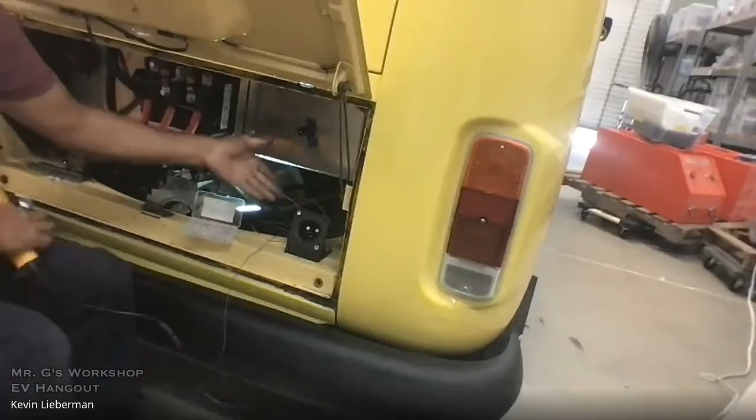And what's the 3D printed part? We're going to go through it more later, but just as a preview. Yeah, so we're using the NACS connector on this bus, and we had it in the gas tank hole, which is nice and sexy, but it's like trying to give an elephant a proctologist exam to try to get your hand in there to get it back in the right position. It's so difficult. So instead, I designed and 3D printed this bracket for the NACS adapter that goes right in there, going to sit in the engine compartment instead until we find somebody small enough, brave enough, and with skinny enough arms to put it right back in the normal gas hole.

All right, so that's awesome, and it's actually better because you open the door and you get to show what's going on. So yeah, let's get into more of that a little later.

That's pretty cool. All right, we also got Tyler Joy, and we got Nick C from Arcblast. How you guys doing? Not bad, glad to be here. Doing good. Doing good. And they've got some cool stuff to show us all about how to get an electric race car to compete with gas cars.

You got to do battery swapping. Wham! Pull the battery out, drop it, get the next one, throw it in. And it's not that simple because they're heavy. So we're going to see all the CAD work that goes along with that. And I know that actually Alex has some racing experience as well. So these are like the perfect people on the call. Pretty cool, tonight is going to be exciting.

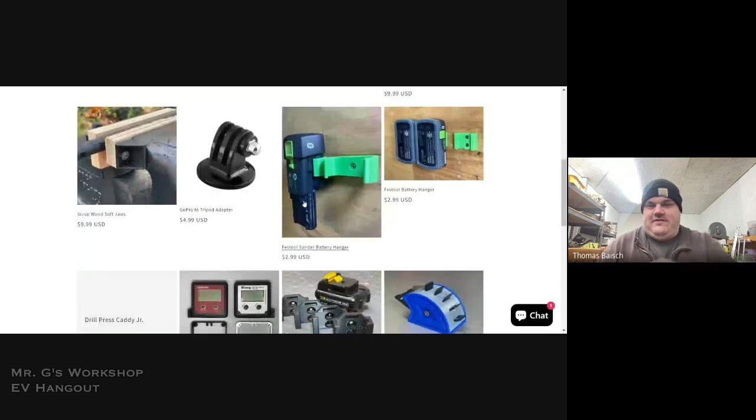My first thought was, that's a stupid problem. But when you take that thing off its loop, it pokes out at you, and it's just waiting for you to throw something on it. That's just like a Livestrong bracelet. No, it makes sense because otherwise it's going to sit on the floor, or on a shelf. You put it, you hang it on the edge of a shelf and then eventually it gets knocked over. But this, it's just a more secure way.

So you pick the product you want to talk about because you got so many? I know, scroll down. Well, some of them are replications, so that's a Delta lamp.

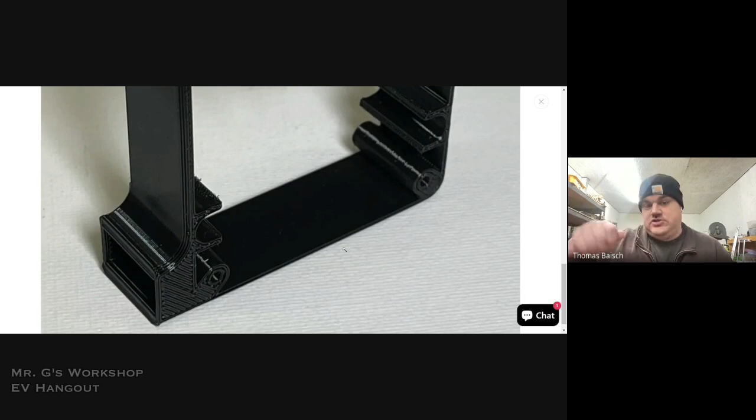Here, the digital angle finder, I think, is designed - it's not a great picture though. No, that's the indicator, that's just for my lathe, and 3D printing is fine because that's about how accurate I get. So this is a digital angle finder, and what you're looking at there is a new ring for it - you basically unscrew it and replace it. On the bottom left is where you move the magnets to. This is to find the angle on your table saw typically, though you can use it for anything, of course.

The way it comes - I don't have it in front of me, but I have this in front of me - the magnets are on the side, and you have to raise your blade. I'll use the bottom of my screen here. You have to raise your blade enough for the entire thing to hit the side. There you are. With that, you only have to raise your blade about 3/4 of an inch, and you can snag the edge of it. Does that make sense? Did I explain that well? I think so, maybe. Oh, it's on a table saw. Yeah, on a table saw blade. Normally you have to put the whole face of that edge on your blade, which means you have to go almost all the way extended, and it's a super annoying thing.

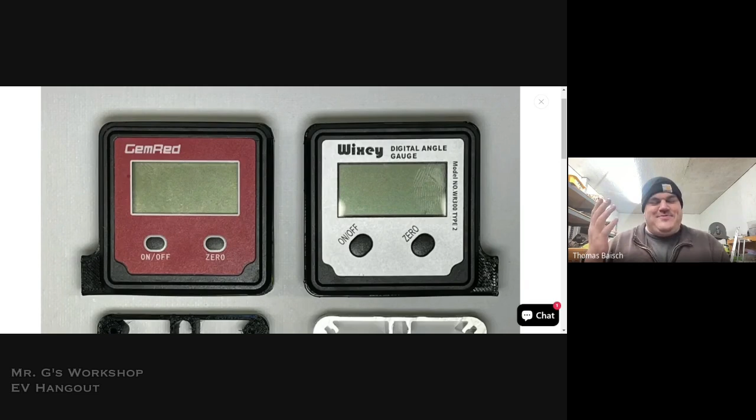But it's barely a problem, right? Woodworkers like to spend money on all kinds of stupid things, so it fits right in the category, and I'm one of them. I'm not blaming them - well, it saves time. Yeah, it saves a lot of time, especially after you get your depth set and then you think to check your angle or whatever. It's super annoying.

There's a lot of battery magnets on there, and then something like here, the card shark on your right, the blue and gray thing - this is just one of those ideas. It's just a card holder, nothing special about this. The only thing special about it, and it's not even in this picture because I'm terrible at updating my website, but I bought micro SD card slots that you would solder onto a board. So when you put them in there, they actually click in and click out. But they're not soldered to anything, they're just friction fit into there. Oh, that's cool. Yeah, it's just a clever idea.

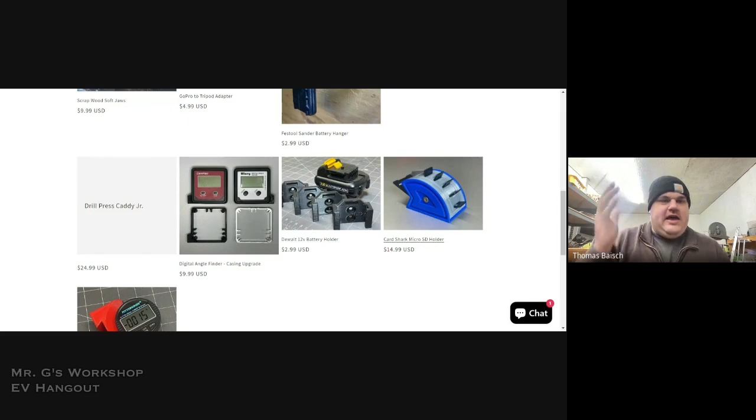But again, like this is one of those examples of it's kind of too expensive, but that's what it cost me to make it. The whole idea behind designing as many things as I can as quickly as I can was to just ignore those factors and just do it. And a few of them sold.

And what about, what do you think your highlight is? The FrogPod? Yeah, FrogPod - so FrogPod was number 39. And I have one here, of course, I had to go grab one. It's a camera mount. I should have sent you the Kickstarter page, there's just better photos on there.

But that first photo that'll cycle, there's a GIF there. Yeah, that explains it all right there - literally, that's the whole idea right there. It's just a 3-legged magnetic tripod, essentially, and it's very hard to get off sometimes. That was number 39.

And that's what slowed me down on my path to 100 ideas. I did a Kickstarter for that, raised about 35 grand, which was incredible. I printed every single one of them on Prusa Minis, delivered every single one of them - I'm probably around 1,000 FrogPods sold at this point. Yeah, that ruined my goal, but at the same time, it proved what I set out to do, right?

Yeah, it works, I have one. I appreciate it.

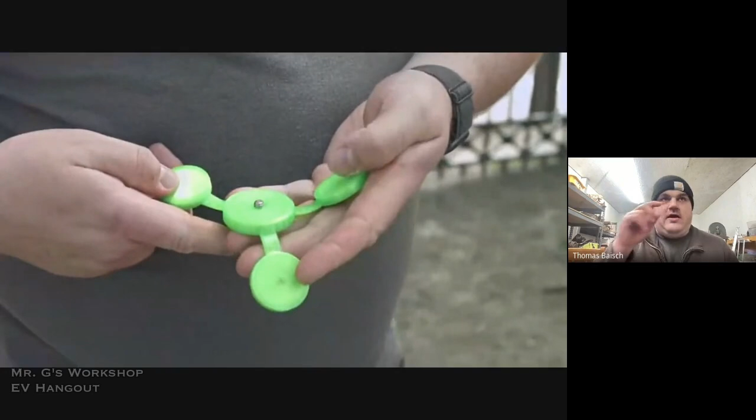No, a lot of them need to fit something, and the iterating to get something to fit, you can usually print just that portion of it. You don't have to print the whole thing to make sure it fits. You can print just like the circle that fits on the rod, right? You don't have to print the whole contraption.

With the FrogPod was the first one where I felt like when it was complete, it was actually done. So many of the things I could go back and redesign 10 more times, even though they're fine, they work, I've sold them, there's no complaints. I feel like I could just keep iterating on those things. This was the first time I felt like I couldn't improve it anymore. I'm not going to say it was perfect, that's not what I mean, but it didn't need anything else. It's perfectly good enough. It really was. It still is.

10,000 people told me to put suction cups on it, and it took me a while to just be like, no, that's not what it does. Glow in the dark, and to just turn it down. It doesn't have to do everything, but what it does better than anything else, right?

Does it glow in the dark? That's what Frank wants to know. Is that what you just said? No, not yet. I haven't actually... I don't know if they make glow in the dark TPU.

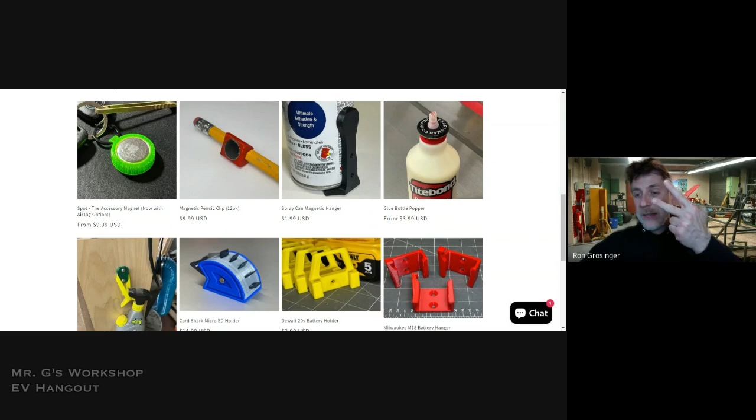There is something very curious about what you've done. I have 2 observations, kind of questions. What is your go-to CAD and 3D printer of choice? And then, how are you making this awesome, flexible? I tell you what, I've pulled on the FrogPod, it is incredible. So 3 questions: what's your CAD go-to of choice, what's your favorite printer for certain situations, and how are you getting filament that is flexible?

Yeah, so I use Fusion 360 because it was accessible. I was using SketchUp a long time ago, and it had its limitations at the time. I have no idea what SketchUp is like now, so use it if you use it. I switched to Fusion 360 because it was free, and they've changed their pricing structures now, but it's still free for some access. It's very powerful, and it's simple enough that you can learn it, whereas SolidWorks has so much more power, so much more possibilities, but the barrier to entry is way higher in my opinion. So I do like Fusion for that reason.

I forget your second question. The printer of choice? Yeah, so the printer I'm using now is the X1 Carbon by Bambu Lab, and I gotta say, it's almost flawless, it's almost a perfect printer. Is this it right here? Yeah, yep. So that hit the scene, and that really revolutionized the consumer 3D printing market.

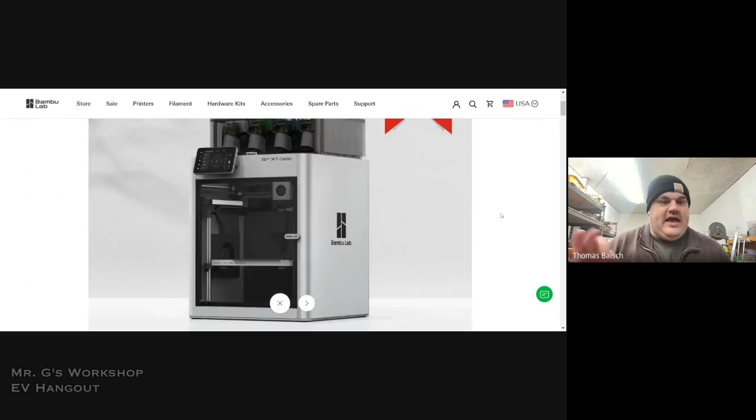It came out with so much more tech than anybody else was using, and for the same price point as the other very popular brands. And it just works every time. The few failed prints I've had, several of them were my fault.

Like I put the wrong plastic in and didn't realize it for a while. It's reasonably priced. Even with the AMS, the filament changer on top, it's like $1,600. $1,200 without it. Honestly, you don't need the filament changer, but it's just a nice perk. Very reasonably priced, good size print bed, and I'm telling you, the thing just works.

How many of these do you have? Just that one, just one. You do all your prints on one? Yeah, I'm not that busy. But this thing's also like, I want to say...

I bought 4 Prusa Minis for the FrogPod thing, and I've since sold 3 of them. But this is faster than all 4 of those combined. I can print more on this than anything else.

I make these TV doors for an old TV from the 80s, the doors you click and they drop down to change your color and tint. It's for a collector's item between Sharp and Nintendo, with a Nintendo Entertainment System built into the bottom like a TV VCR, and these two doors are always missing. I recreated them and print them, and it's a high quality print because that's what the community wants. One door took over 15 hours to print, and this printer does it in 3, and it's better quality. I can't recommend it any more than that.

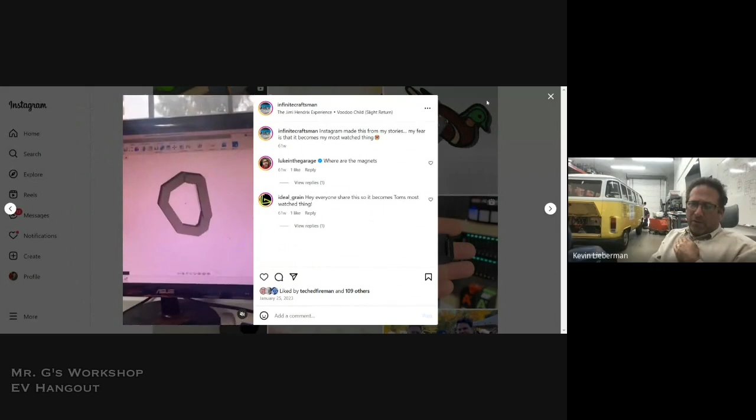But I've wrestled with so many terrible printers, and the project becomes getting the printer to work instead of printing what you want. So I'm tired of that. It's got to self-level the bed, it's got to get to the right temperature. I don't want to be updating firmware all the time, making plates of spaghetti. It's got to work every time. So that's why all my cheap ones I've given away now, basically, and I'm saving up for that.

Give them to your enemies. Yeah, I put an ad up on Craigslist, literally saying 'this thing is a piece of shit, I want $100 for it, I'm warning you.' I really did not pull punches on that.

Well, I will say I felt the same about my Prusa Minis. Also very good machines, almost flawless, but no, the speed difference is incredible. Also the size difference. I know the MK4 now is probably a much better or more comparable machine, but for the same price, it's hard to not recommend Prusa. But Bambu's got them right now.

Okay, so this is pretty cool. I think you've actually cleared up a lot of beginner guidance, like which printer to buy, which software. We're going to get into software a little bit, I'm going to do a demo. I have Onshape, which is a SolidWorks clone, but it's online. Pretty cool, I didn't even know about this printer, so thank you for that. I've been using the Dremel at the high school, and I bought one for myself, but man, that thing's overpriced, it's like $2,000, and I would rather have this.

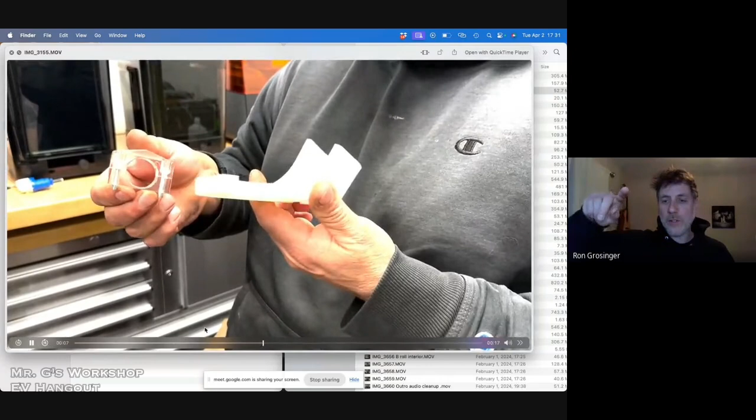these parts for the conversion, like anything. So that on the right there, the white piece, that's a draft piece of a brake switch, and the thing on the left, the clear piece, was a cable management for all the communication cables with all the AEM stuff. So later on I'll try to find a clip of where they keep all their AEM cords nice and tidy with 3D printed parts.

That's awesome. And I don't think you fully saw it. Yeah, to bring it back to the conversion world, this is this little bracket I made. Just needed something real quick that would do its purpose. It's just strong enough. It was easy enough to make.

Can you get closer to that? I can show you the CAD drawing. But that's a lot better. Wow, that's cool. That just mounts right there for you to use when you want to charge. Yeah, exactly. It could be better, but I don't know.

It's pretty good. So bringing it back to the conversion world, what I wanted to say also is that some of these materials are good for automotive and harsh environments, UV and heat, and some are not. Different quality, you can have different filaments for doing different purposes.

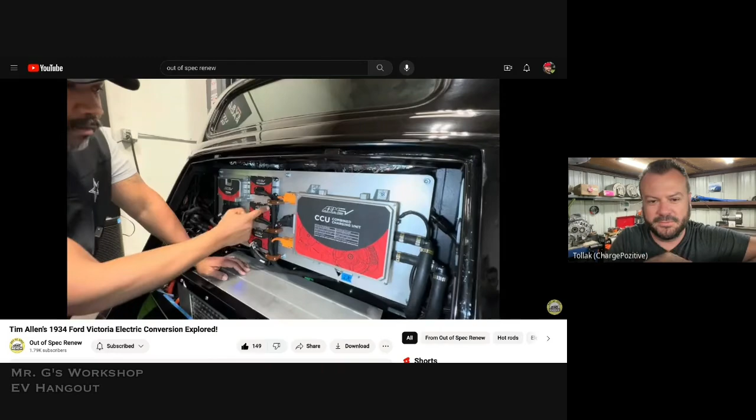In fact, there's Eddie with his printer. So those are keeping tight all the communication cables with all the AEM systems there. That's so cool that there's this chance. Back in the day, you'd have to machine that yourself. Iteration's so quick on a 3D printer, it's just unbelievable. What an incredible thing to solve a little problem.

I want to take a moment just to introduce someone. I hope I'm saying her name right. Sifa, how you doing? Hi, I'm good, how are you? All right, welcome, we haven't met before, thank you, I'm glad you're here. Are you into electric vehicles?

What, sorry, can you repeat that? We haven't met before. Are you into electric vehicles?

So yeah, I've spent the past 3 years converting my Mini Cooper to electric. I'm in college right now, but I had spring break 2 weeks ago, so I went home and drove my car around the block, and it was stressful. Some things happened, but I had to fly back out to college. So my next step is to go back home and test it with coolant, because I wasn't using coolant at the time and there were a lot of problems. My brake system, I have a clutchless system, so that has its own problems too. I also don't know how to drive stick, but I'm figuring it out.

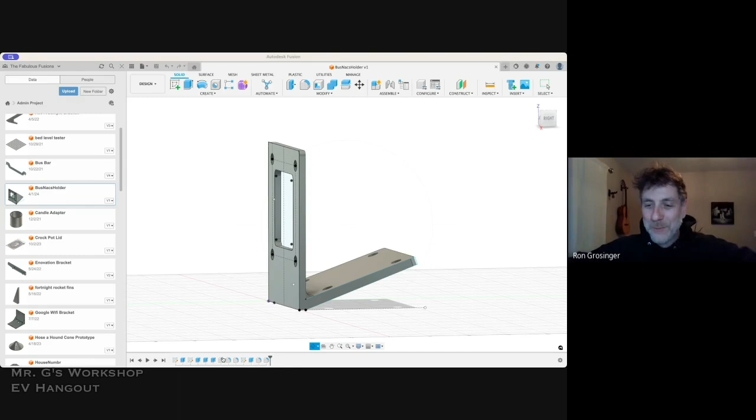Have you used any 3D printing on your EV conversion, to get with the theme of the day? Wait, can you repeat that? What about 3D printing, have you used any 3D printing in making your EV conversion?

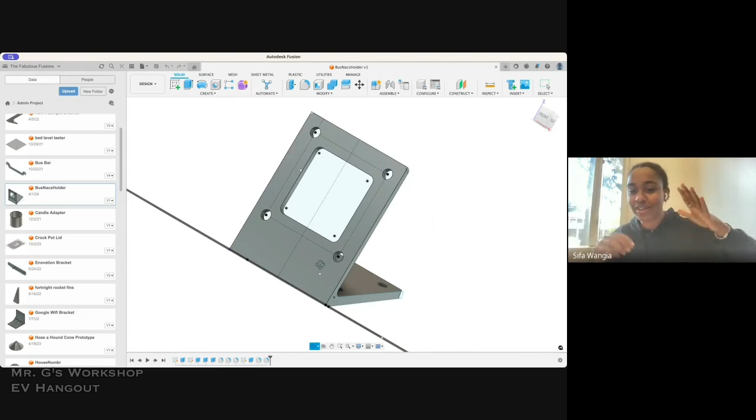Sadly, no. The closest I've come was for my motor adapter plate between the motor and transmission, because I was using a Warp 9 motor and there were CAD files out there, so I gave the machine shop my CAD files, but I didn't actually manipulate the files. Freshman year, I'm a sophomore now, I was a mechanical engineer and we were learning 3D printing in SolidWorks, but when I was working on the adapter plate it was before college, so I didn't know SolidWorks and all that stuff. I just had the CAD file, got measurements from it, and sent it to the machine shop. 3D printing definitely would have been helpful for that. Also for the transmission, I was thinking of ways I could possibly 3D print that, but my transmission is so irregular, so I ended up tracing it, putting a pizza box on cardboard, painting the transmission, putting it on, getting the print, and giving it to the machine shop. So sadly I didn't get any opportunities to 3D print, but I'm excited.

I don't know, I'm intrigued. Well, around here we call that cardboard aided drafting, right Mr. G? Yes, that's still CAD, that counts.

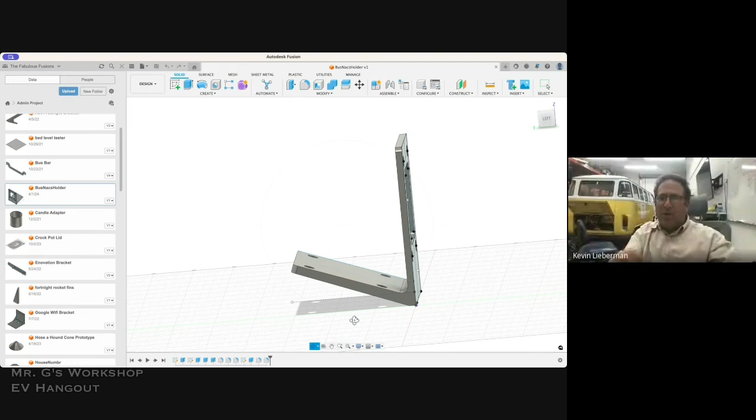Oh, you're muted, unmute yourself. Yeah, I can't rebut your flying buttress point. So I did fillet this right here to try to make it stronger, knowing that yes, anything where you have a sharp angle is a place for it to crack. But yes, if somebody pulls on this cable, this thing can crack right over.

But you know, I only sort of know like half of what I'm doing in Fusion 360. There's tons and tons of videos on YouTube about how to do it and all this, but I'm kind of in between. I just want to get this done, I don't want to learn everything, but I should probably learn better what I'm doing so that I can do this properly instead. Go ahead, Thomas.

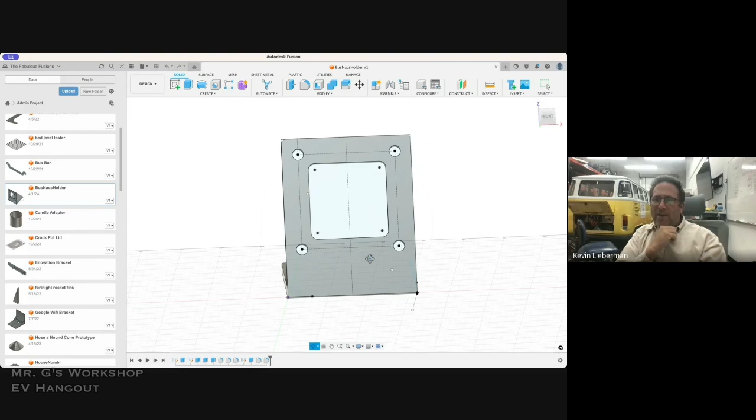What's the hole size and the space between the holes, and that square size? The holes are M6, 6.5 millimeters I believe. The spacing was like 60 millimeters or something, I forget. I went by the CAD drawing, I didn't even have the physical NACS connector in hand.

Can you click on those dotted lines, those construction lines, and it'll tell you? I'll see. Let's go here. I'm going to redraw it while we're talking on here. Oh nice, show it to you later. I was actually thinking the same thing. I'm like, dude, I can't look at this thing, it's going to break. All right, there you go. Screenshot that, zoom in, yeah zoom in Kev, and send that to Tom. I got it, I took a picture. You can screenshot. Oh beautiful.

So here, well this was my very first iteration of this using heat set inserts, and this hole needs to be a tad wider than it is. What is it set at right now?

I don't know, like there's ways to draw things correctly and ways to draw them wrong. And if you draw them correctly and you need to make an adjustment to a measurement, it flows right in there. And if you do it wrong, you make a change to a measurement and the drawing blows up on you and shoots off to infinity.

So let me interpret that a little bit. It has to do with parametrics. So yes, it's almost like constraints.

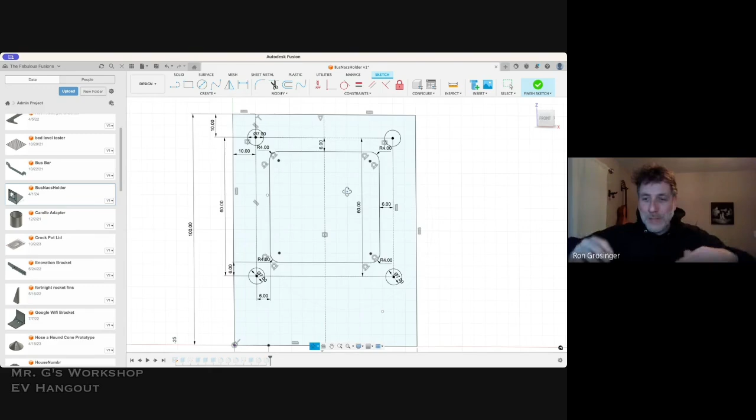So like if you gave someone an address, let's say you're going, hey you need to go to the corner of 60th and Boulevard East, that's a place in New Jersey. And if you say, hey I want you to go to Boulevard East and 60th, you said it in reverse but it's the same location. The computer's not going to like that. Not that reverse, I'm just using an analogy. You can't ask it to be somewhere and also ask it again from another angle, it has to have one command. And then the other thing is that when you do one, you should have a mirror.

So if you change it, and you know you're iterating, you should use a pattern feature so you only got to change it once and then everything updates. Yeah, Thomas, you want to add anything to that?

Yeah, learning how to think through the parametric nature of it makes iterating so much easier. So this can be drawn to where you can go back and change any of the dimensions and spit out a new file within seconds, right? Walking you through that right now would take too long, but that really enables you to go back, make that small tweak.

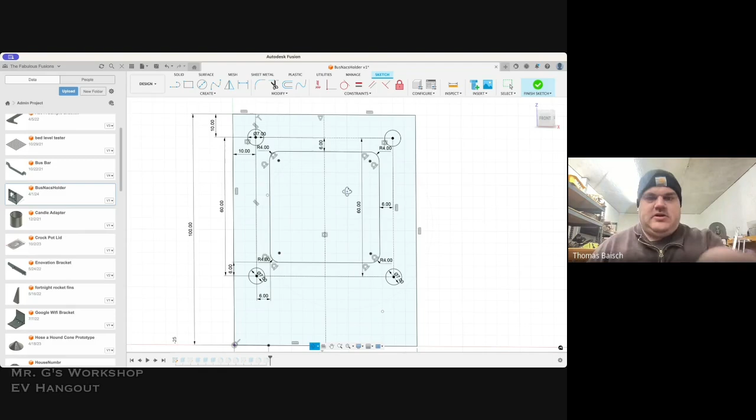So like that center hole that needs to be a little bit bigger, right? You can just go into your parameters. Usually that starts with which one dimension is the only dimension that even matters, and then build off of that. Instead of putting in values for all of the other dimensions, you simply take that initial value, so like 7 millimeters for those holes. That's probably a critical dimension, and also the spacing of those holes is the critical dimension, right?

Yeah, and everything kind of relates to that. So even that outer perimeter relates to that. So you can just take the 10 millimeters from the center of the hole to the top of the piece.

Right, that can actually be the diameter of the hole plus a number. And when you change that diameter of the hole until it's the right size, it'll keep expanding that, so you keep retaining that border, for instance. Does that make sense? Totally.

That can be extrapolated through the entire piece though. Right, well it's more like this needs to be based on the center, because if I make it bigger or smaller or whatever, it needs to remain centered on this thing. And that's where, so I basically at some point, trying to fix this thing, it just blew up and went crazy on me. I'm like, it'd be easier to redraw this than try to figure out why.

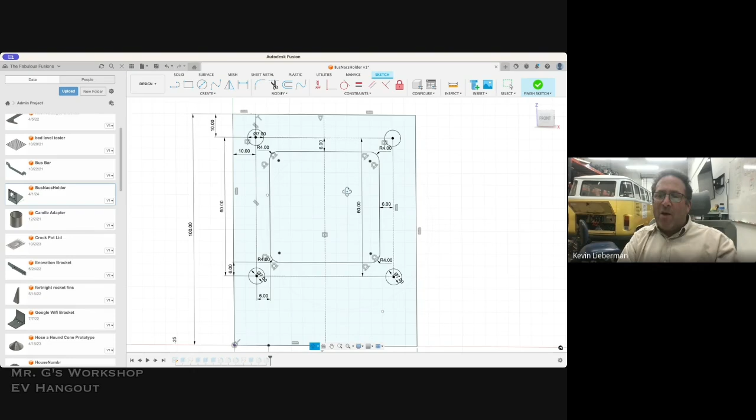No, 100%. Almost everything I do, I end up drawing at least once, starting a whole new file, because the first time is just getting your idea out and putting it down. Then you keep that file to the side, pull all your dimensions off, and redraw it in a cleaner way.

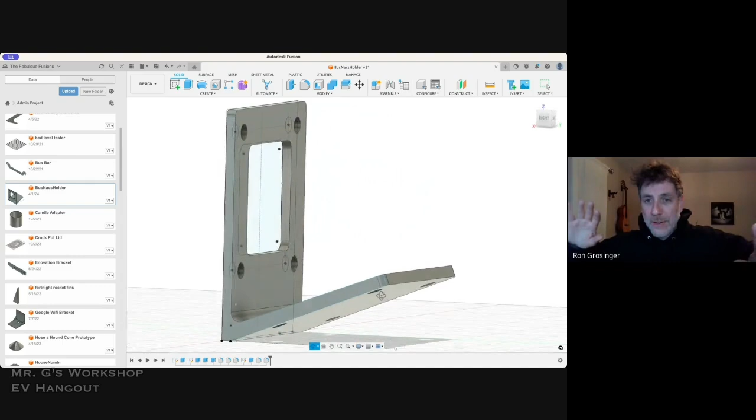And then you use less dimensions and more referencing. I want to add that you can change your critical dimensions without even opening up your drawing again. So if you know your hole size might change, or your center might change, that'll be called a variable - that's what it's called in Onshape. You have a list of variables, so you can just change them as you go.

So here we go, Tom's going to show us. That would have been great to make that angle here a variable, so you could try it at 10, 12, and 15 degrees and see which works best. Now I did an offset plane to this, hacking my way through it rather than really understanding.

What do you got? Oh, you're muted for some reason. Just unmute yourself. I don't know how - man, I had some really smart stuff I just said. I guess you missed it.

So this holds sockets in my toolbox, and the file for it is literally just one. As you measure, you can literally measure these with your calipers, put it into a spreadsheet, and import that spreadsheet into Fusion, and it will spit out a file for every single one you put in your spreadsheet. These all puzzle piece together and hold your sockets exactly to the diameter they are, and it prints the number on it automatically for you too. I've got a chain of these that go all the way down to 7 millimeter size, and it's just this one file - not all of them.

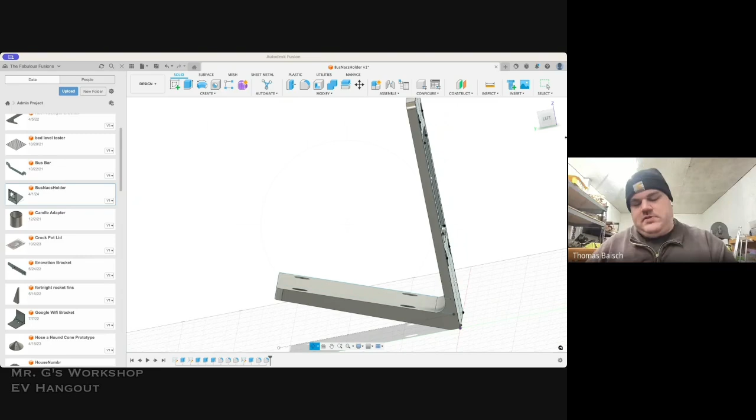Yeah, I've done something similar with 18650 batteries, making my own battery packs, to bring it back to conversions. I needed one that was 6P12S or whatever it was - I just gave it that and it designed the file for me, and I printed it out without doing any actual CAD. I've got a video that's only a minute long that's going to show this in the background - Kevin, if you stop presenting I'll show it real quick. That was one of 100 examples of things I've printed for my EV stuff.

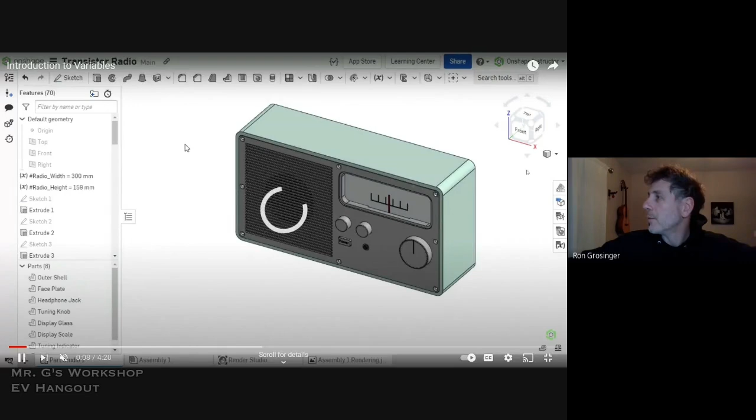So basically what we're talking about is having variables. Here's this little clock radio, and if you notice it has these X's, that's the variable, and you can change all that. If you start with the grid for the speaker - it's just loading now - you add in these variables that extract out, so you don't have to open up your CAD any longer, you just go ahead, and there it is - you can change those variables on the fly and it'll work pretty good. We're getting into a little bit of an internet problem, but you get the idea.

So once you put these in, if you're using Fusion - Kev, are you using Fusion 360? Yeah, that's what I use. For the same reason, it started out free, you get 10 designs or something, and then they start charging you.

So anyway, I'll just move it along. So they go ahead and change the diameter of, let's say, the bolt or the hole size or the whole thing basically, and then you could just change it on the fly. So here they are. But you have to set this stuff up ahead of time.

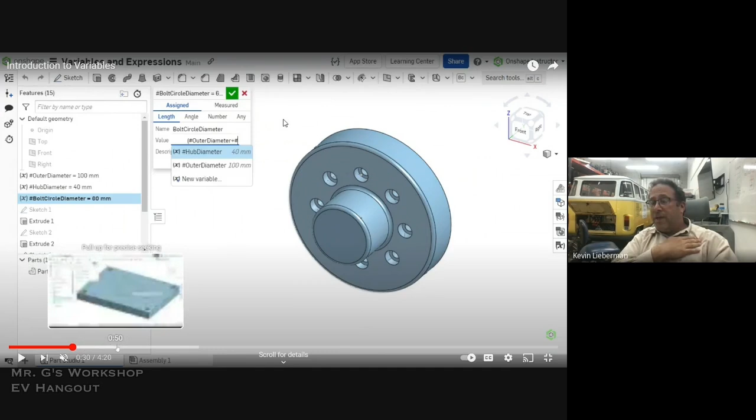I'd also like to say that for doing basic stuff and getting a part out that holds your wires or holds your bracket, you don't have to get super complicated. This is advanced level - to make the basic stuff, it's not that hard. Don't be intimidated by it, try it out, usually it's free. And when you make a mistake, it's easy to crumple up the paper and start over again.

Yeah, totally. Okay, alright cool, so that was it for that. Let's go now to actually putting parts in a vehicle. I think it's Alex's turn now - so Alex from Maverick, very cool stuff. What an incredible situation, he's providing a lot of good solutions for the EV world, and he's got these drivetrains. Alex, you want to tell us a little bit about what you're doing there, and then we can get into your iterations, how you use it.

First of all, I just talked to Tom that I 3D printed my Maverick e-beam just like this.

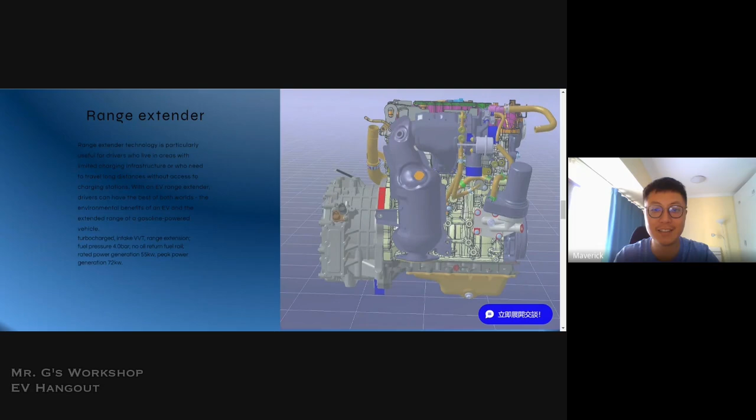Do you have a photo of that 3D printed? Yeah, it's just a link from my Instagram, and I sent it. Oh okay, yeah I have it. Got it, no problem. Oh, that is so cool.

What we've looked into for 3D printing is these motors are too heavy to pick up and bring where you need to, and they're dangerous and they're expensive. So we 3D printed it first, and yeah, it's not going to get you down the road, but it's going to make sure everything fits when you need it to.

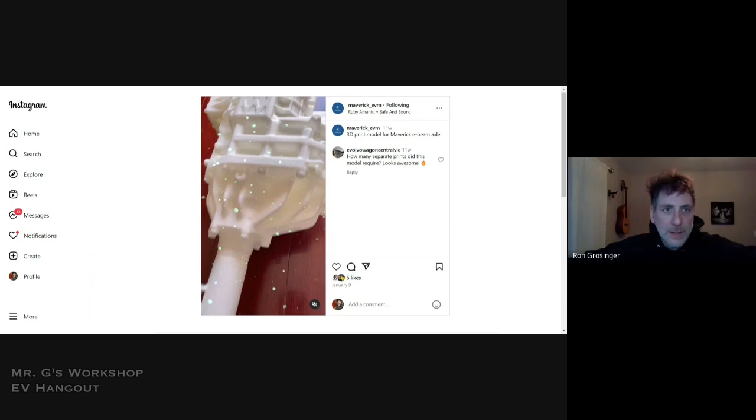Yeah, I 3D printed my e-beam and took it to my showroom in Texas. That is super cool, what an incredible thing that you can just 3D print something, and then use it to fit, to make a decision about how something's going to fit.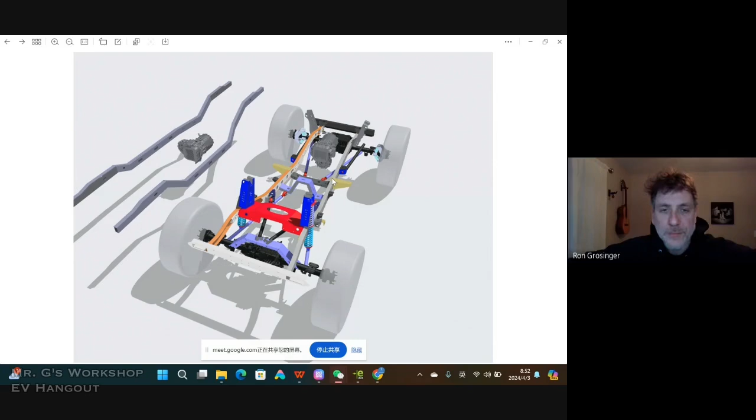We just put our Maverick 25 in there, trying to figure it out. This is an e-beam, Maverick e-beam unit, and we're trying to figure it out for the FJ40, because I'm a Land Cruiser fan, the same, literally. Wow, this is a treat.

So are you going to put it in the drive shaft line where it was? Can you show a top view? Yeah, I'm figuring it out, oh yeah, so it's kind of like a drive shaft interruption. That's wild. Oh yeah, look at that. Okay, there we go, there's a top view.

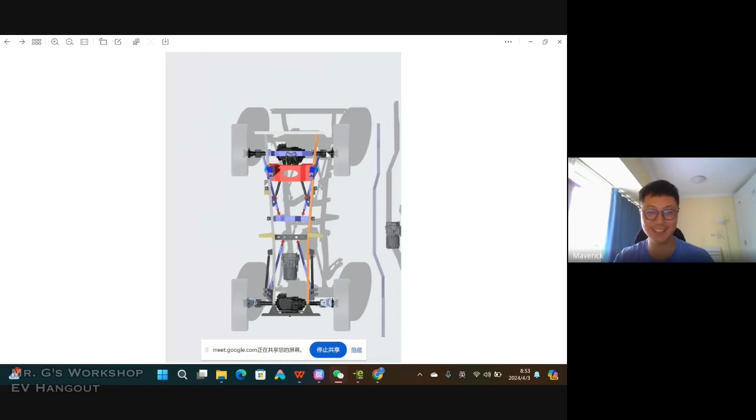Oh, so I see you have the e-axle in the back. Yes, it's here and here, it's a Maverick e-beam, and we're going to try to figure out the suspension, use the 4-link for off-road. It's an electric off-road Land Cruiser, right? Wow, that's going to be popular. People like that stuff. Yeah, I love this too.

Yeah man, pretty wild. Thomas, take a look, this is going to be one of the motors that you guys maybe use for your Kubota. He's got that motor right there in the middle. Can you zoom in on that, Alex? Oh there we go, so he's got axles that have electric motors in them, but then he also has that one in the middle, and that's like a Tesla motor turned longitudinal.

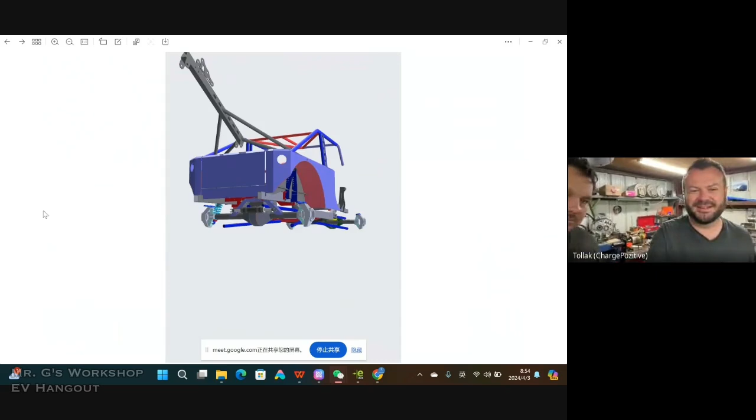Tollak, what do you got? I was just having Johnny come look at Alex's setup. So you said this is for an FJ, right? Yes, it's for the FJ40. That's pretty cool, yeah right in the middle there. That looks like a Torque Mountain's Jeep setup almost too. Oh yes, it's almost the same. Yeah nice, oh cool.

I see, and you have a 4-link, I see you're making brackets for that. Yeah, I will manufacture it in China, and maybe I will ship to Texas to promote the Maverick 25. Yeah nice, that is awesome.

Pretty cool, Alex, this is great work you're doing, showing what is possible with just doing the CAD work to figure out where your placement is going to be. Yeah, thank you, very cool.

And this is the FJ40, and I just put my Maverick 25 model in it, and also the Maverick EV, and also I can put the Maverick 12 rear drive unit to drive the rear or front differential, and I can use my own VCU to control both of the motors.

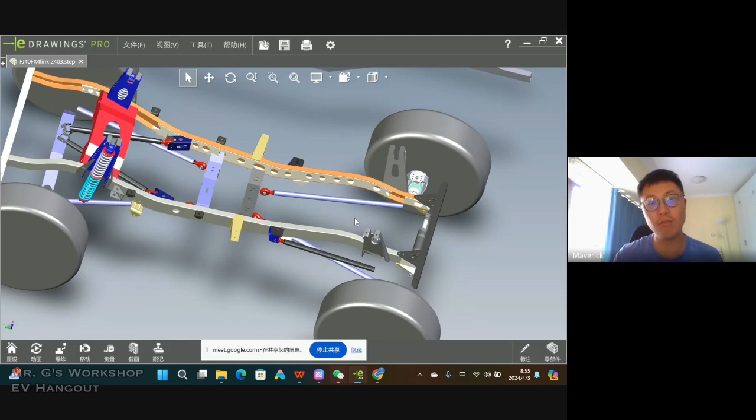Yeah, and also I have a new product to show you guys, it's a Maverick CCU, which is the 13 kilowatt OBC. Oh, what's OBC mean? Onboard charge unit.

Oh, onboard charging unit. Yeah, I can show you now. So that's pretty cool, so you have a charger now. Yeah, I will show you. It's a little heavy. Hold on, let me pin that. It's a 13 kilowatt OBC.

And it's a 2.5 DC-DC, and also it's a junction to the motor, so it contains the junction box in it. Actually, literally, it's a 3-in-1. The OBC and the DC-DC and the junction box, 3-in-1.

Wow. Tyler and Nick, is this something you guys could use in the racing situation? I would say that's actually pretty slick. I don't know if we can use it for racing because we don't want a charger on board, but combining the junction box and the inverter would help us quite a bit.

So is the junction box kind of like a contactor box? It's just a place to put the high voltage? Yes, something like that. That's interesting, and 13 kW, that's a pretty good charge. Yeah, that's almost half the time to charge the battery. And that's from AC to DC, right? Yes, it's AC to DC. Nice, that's pretty cool.

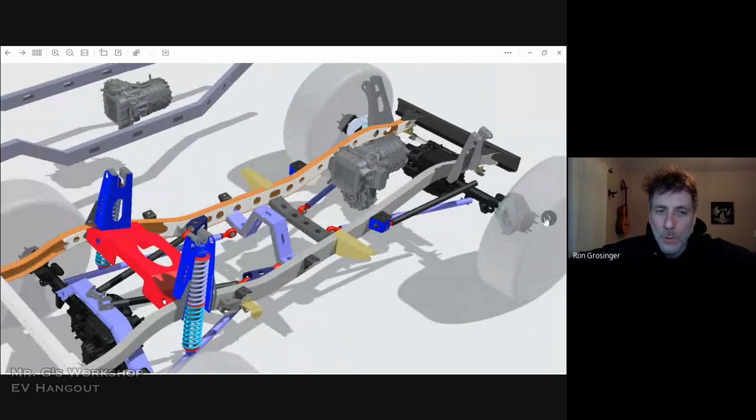And I got to tell you, if the faster you charge, you know, I'm driving a Model Y now, the supercharger is like a game changer. But when you go to those home chargers or a public charger, if you're under 6 kW, man, it's just not even worth it. It's just such trash. You need like 10, 13 kilowatts, you need power, man. Well, especially if you're dealing with the lower efficiency of the vehicle, the more you need a higher powered charger to get meaningful miles.

That's also true. Yeah, if you had a good vehicle. But you know what, the classics, everybody likes the boxy looking classics. So what are you gonna do, man? People are in love with these old vehicles, they want the modern drivetrain with the old vehicle style.

So anyway, coming back to the CAD and the theme tonight, Alex, this is great stuff, I really appreciate it. Now let me ask you a question. Do you give out the CAD, not the internals because that's proprietary, but the outside dimensions so that someone could put it in their design? Have you thought about that?

Yes, I can share the views to everyone of Maverick 25 and Maverick EV, the STEP files or STL files. I can share that. Oh, that would be great.

But, you know, I don't know if people are aware, raise your hand if everybody knows McMaster-Carr. Oh yeah, everyone, right. I'm their number one customer. Yeah, well then you're broke then because they're expensive. No, but what's fantastic, preaching to the choir here, and maybe Sifa, she's new, so maybe she should learn it.

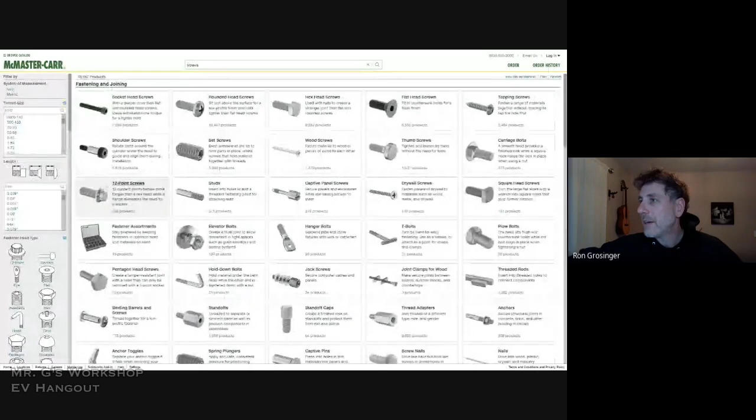Is that what happens is you take, let's say for instance, even if you needed like a nut or a bolt, something simple, and let's say you go to the screws and bolts, and then you just pick one. It doesn't even matter what you pick, you could just pick something. But what's kind of cool is they will give you the actual CAD file.

It's just loading, let's see. Log in to view product detail. Oh, that's weird, I have to log in for this? Nah, get out of here, I never had to before. I think it was, oh that's interesting, you have to log in now. I didn't know that. Okay, well I have a login but I'm not going to do it now. So anyway, yeah, they give you the CAD and then it fits in your model. And so if you're new to CAD modeling, you don't have to struggle, you could just download the stuff you need and populate the model.

All right, so let's say it was something more complicated, like a linear actuator or a bracket, a nut and bolt is not that interesting, but then it's really helpful. So I mean, yes, see how this linear actuator is going to fit in your design. Yeah, 100%.

Can I show you something real quick? I have this nice 3D printed AC51. Oh no way! Motor. It took almost 3 days to print, and it's a little messy, but I actually ended up not going with this motor.

I went with the Motenergy one, but it was good to see how it fit in the car.

No, this was actually the upper limit of what my printer could do, 15 inches tall, and I couldn't even print the shaft out the top, but this is all I needed. This was some cheap Creality printer, basic stuff, but it got the job done. There's some spaghetti there, but that's a rough fitment model that you can hold on your lap, put on your shoulder, fly with it on an airplane if you had to. You're not going to bring the whole motor with you to where you need to go. So for dimensionally fitting, that's great.

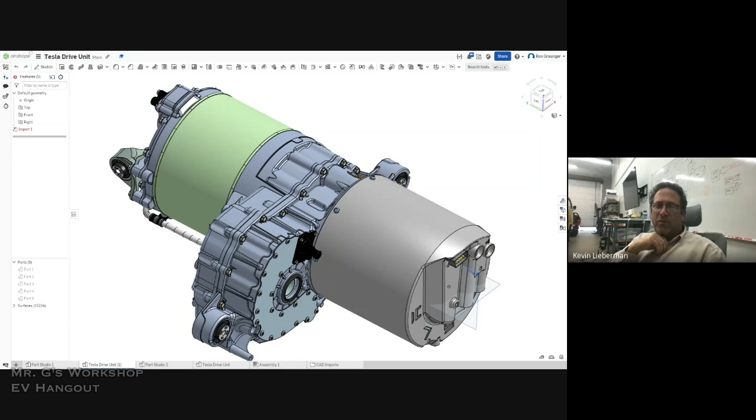Is this going to interfere with the frame of your car? Well, you made one, you'd find out. Right, exactly. Pretty cool. All right.

So in the interest of time, let me see, Sifa's there, I could see her. Did you know about the McMaster-Carr situation? Do you know about the CAD parts? Yeah, no, I was not aware of that. Okay, this is the gem. So check this out. Let's say this was the particular screw that you needed.

Random idea, but you would just go over to pick your CAD, you see right here, and then usually just take the solid modeling one, like SolidWorks, download it, and then upload it into the CAD program. Oh, Alex, thank you so much. That would be great. We would love to see the CAD models at some point to help with the students, we're all students, putting it together.

Pretty cool. So anyway, am I saying it right, Sifa? Yeah, you are. Okay, perfect.

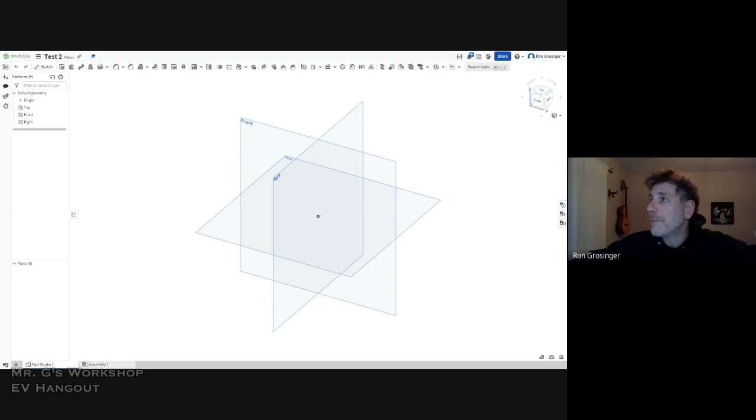So Sifa, what you do is you have your CAD model here, and then you go into here and pull up a document and go to create new document. We'll just call it test, test 2 or whatever, because I probably have a test 1 somewhere. And then just go into import right there, and pull up the screw that you just downloaded. It'll import it for you, and then it should pop up. It's in progress right now, takes a minute, and you just click on it. It's loading, and then there it is. So now you have all your dimensions, and you can put it in your CAD model.

I mean, obviously this is ridiculous, it's just a screw. But like Kevin was saying, McMaster-Carr is wide open. This is a lot of stuff, these are all mechanical parts.

So anything you can think of, I don't think they give you the CAD model for everything. Like you can buy brooms on here to sweep your shop, they're not going to give you the CAD model for that. But if it's something you buy that gets inserted into an assembly, it's going to be on here. And I guarantee you there.

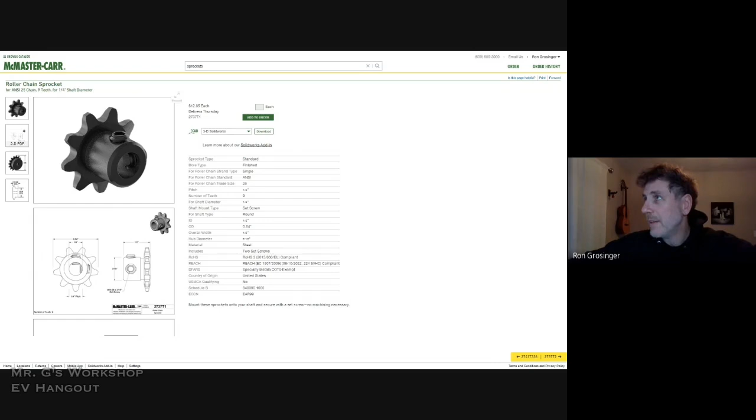Boom, we're actually doing this pretty quick, which is nice. Then it'll pull up its own little tab. You click on the tab, it's still loading, and then pow. Let me just get rid of these, they're kind of in the way. Okay, here we go, look at that. Pretty sweet, right? Print it and see if it's going to fit in your assembly and interfere with anything.

So it's kind of like cheating, but they want you to, because if it fits, you're probably going to buy it from them. That's why they're giving you the CAD, not because they like you. Sell more stuff, exactly. Same with what Alex from Maverick was saying, he'll give you the file, so if someone wants to see if his charger fits in there, go for it.

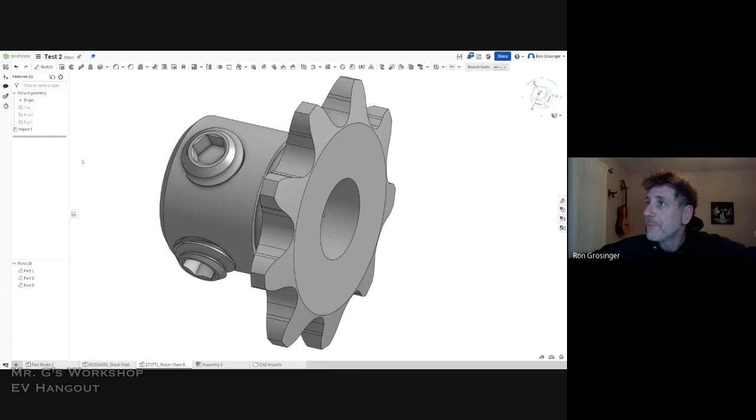So another thing we were talking about this summer is wouldn't it be great if there was a service where you can buy or rent a 3D printed version of the Model S motor, they'll ship it to you, you try it out, send it back. This isn't something you need for a lifetime, just a couple weeks to try it out, or like a lending library of printed parts, like Tesla batteries, things where you need to check their fit. Totally, that's pretty cool.

Who was that? That was Justin that had the 3D printed AC50. Yeah, that's awesome. Justin from Homebrew, he's got an Instagram, you guys got to follow him, he's doing cool stuff. They're going to make it into a drink dispenser or something. Yeah, got to put it to good use. Funny, so okay, cool.

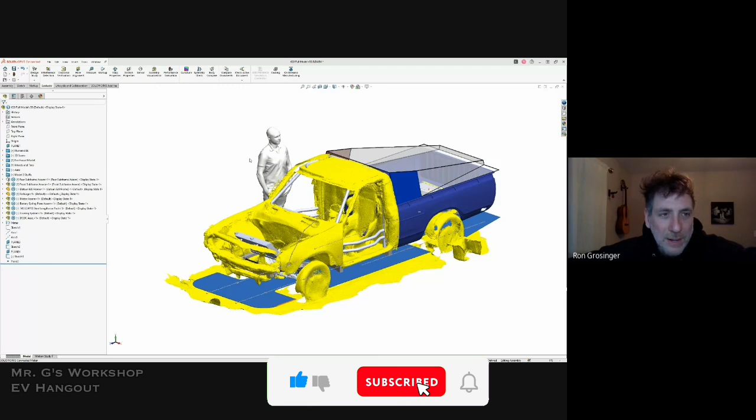We are looking at the yellow and blue scan. Uh-oh, we're sharing the wrong SolidWorks screen, which is so cool, I can't wait to get back to that. That's incredible, I can't wait to see that. Okay, here we go, yeah, we got it now, Tyler.

Now, what tools are you talking about? Like ratchets, wrenches, things like that. So going all the way back to the charge adapter plate mount, make sure you have tool clearance when you're redesigning that, and the best way to do it is drop a tool in CAD. Really, that is interesting. So if you drop a tool, you'll know whether it'll make it to the floor or get hung up somewhere.

Nice, anyway dude, this is awesome. I like that, oh I saw a little homebrew floating up there, that was cool. Alright, yeah I guess, yeah I'm strapped in.

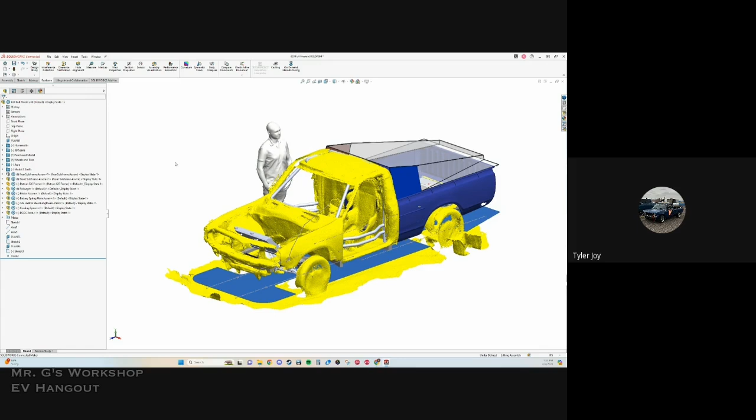I can't wait to take us for a ride through this CAD model, this is insane looking, man, there is a lot in here, it's hard to know where to start. So this is basically just a really basic model of our car, mostly here for trying to figure out little aero bits, like do our battery packs fit, can we fit a motor in the frame, things like that.

Man, I really don't know where to go from. Is there anything you guys want to know? Okay, just go with the batteries. That's the main thing. I pulled it on a different screen, that's why it looks like I'm looking over here, I got to see this big. This is great, look at this thing. Maybe battery and drivetrain and that whole area, Tyler. Sure, let's go with batteries because I think that's a functional thing you could probably slide in and out and show us how it fits and everything. Wow.

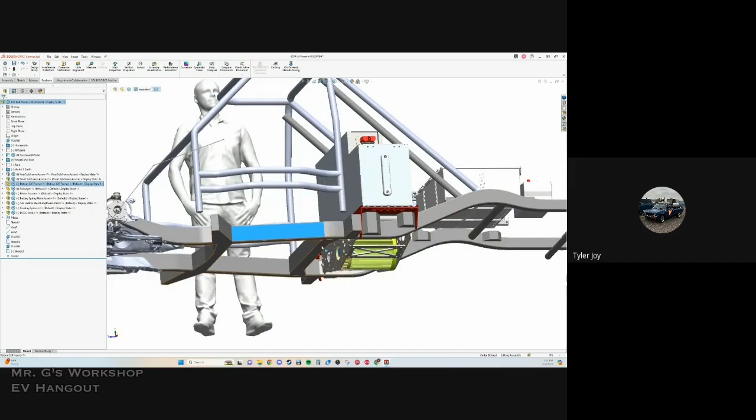Yeah, so a lot of these models are purchased or downloaded. When you're trying to move quick, everything you can find online is gold. So, where to start here? This guy is like a representation of the frame, and that's what I'm basing most of our fitment off of. There are some 3D scans I have for getting down to millimeter clearance, like I had an issue where this motor was too low and we were misaligned with the differential. That caused some vibration, which I can get into in a bit.

We can do a bottom view here. Let me interrupt for just a second, can we just look at this thing for a second? This is not normal, we are looking at a mid motor, am I right? This is mid mounted. Yep, behind the driver but before the rear axle. This is like straight out of a Ferrari playbook from like 1980.

Yeah, there's a lot of benefit for what we're doing. We don't have a transmission, we don't have a long drive shaft. Our weight distribution is worse, but it's still 60-40, so we're still in a good performance range. Let me show the rear diff here. 60-40 rear? Yeah, so I get 40-60, 60 in the rear. Gotcha, which for regen actually helps us quite a bit, we get a little more traction on deceleration.

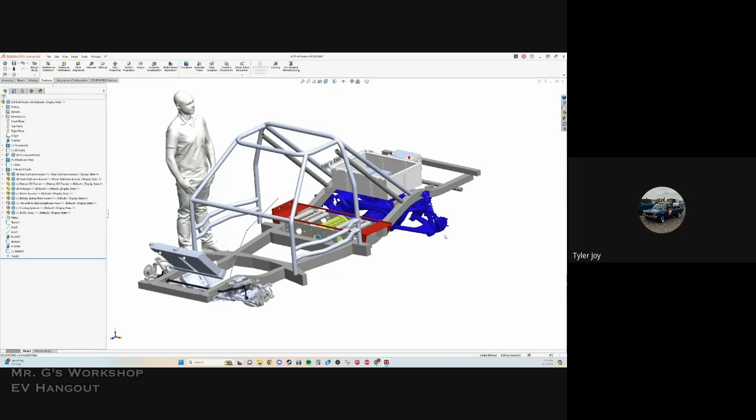But yeah, this motor just lives right underneath the battery, at the back of the cab in the bed. I don't have the model set up quite right for it right now, but that bed's actually going to pivot up around this point here, so then the battery pack comes out the side of the vehicle. Wow, this is so cool.

So let me ask you an honest question: how much of this planning actually ends up working in real life? You have to go back, which is fine, but you probably do a lot of iterations when you get to the real thing, right? Yep, there's always something wrong. I do mechanical engineering for a living, and even at work, you're doing revisions, making stuff, figuring out problems, then doing another revision.

It's really hard to know every single detail in CAD, especially before 3D scanning. And even with 3D scanning, you have to deal with accuracy and file size. If I were to actually show you the full scan I have, my computer might crash. Wild, okay, so cool. Yeah, this is actually the 5th revision of these motor mounts I've had.

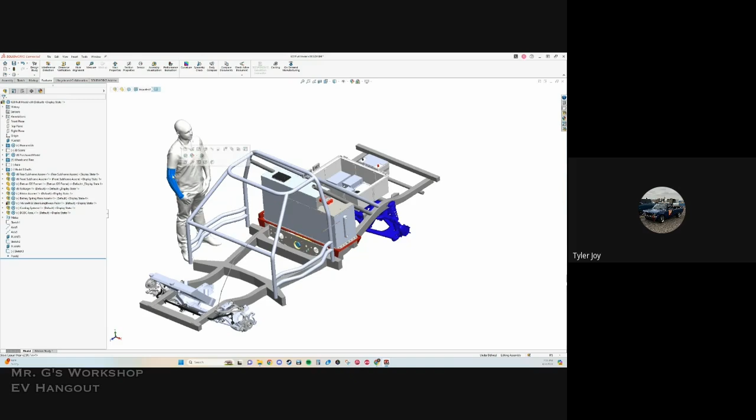Nice, you want to jump into the battery a bit, Tyler? Yeah. So I don't know if I mentioned this before, but we're hoping to swap our battery packs in about 3 minutes, which gives us about 5 minutes in the pit and back out. So this whole battery pack, which I'll bring up the model in a second, is actually intended to slide out the side of the vehicle, and it looks like I have it fully constrained. Underneath here I've actually got a bunch of conveyance rollers that are from McMaster. Oh, no way, so you unbolt this thing. It's on die springs, also from McMaster, battery pack comes off about 1 millimeter and slides out the side onto a cart.

What's a die spring? They're just really beefy springs, usually used in injection molding. Dude, awesome, so the carriage that holds the motor is also the roller frame. Kind of, I don't have them tied together, they're actually joined through the frame, but the support system for removing it is part of the motor mount.

I like it. Let's see here. Pull up the battery for you guys. Oh yeah, there you go.

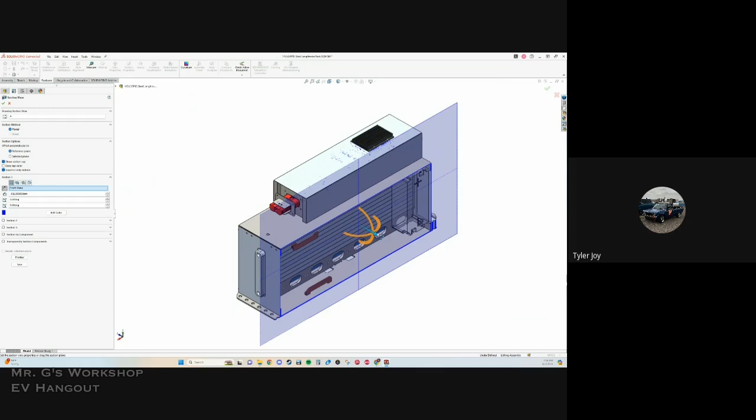Is that a sheet metal part that you made? Yeah, this piece here is a square tube and sheet metal weldment, with some aluminum tubes running through here for cooling. I don't know if I've shown you guys that before. Dude, this is detailed, this is great.

This all ties into what we've been talking about. It requires all the basics, right? You have to be able to make a CAD model that's easily revised, pulling CAD models from the internet so you don't spend hours finding every detail. This is what you end up getting to if you continue getting experience. And I'm not even all that good at this - there's people in the mechanical design world who can make these models in a day or two, they just know exactly how to do it perfectly.

Nice, this is awesome, cool. Oh, the cart - you even made the cart. Yep, I actually just finished this revision last night.

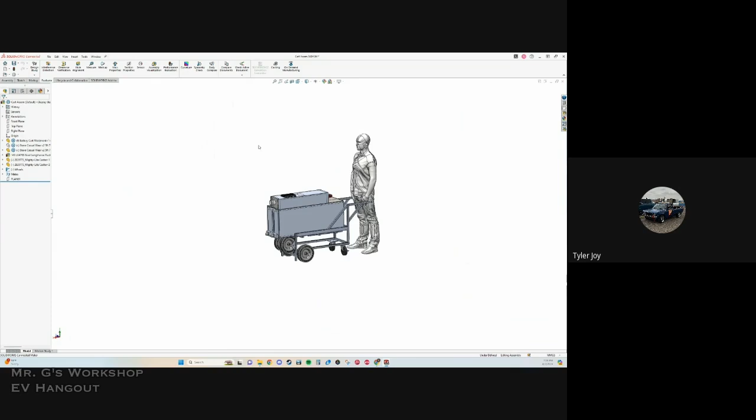Where'd you get the person? I got this off of GrabCAD, which is another useful place to get random CAD models. So yeah, GrabCAD's great. Where's Siva? She needs to take note of that. GrabCAD. And I saw Justin also posted Thingiverse, which is another great resource. Oh yeah, that's true.

Thingiverse, hilarious. Real quick, how many guys are allowed to work in the pit? Is there a limit? Good question. How many guys are in the pit? I actually don't think we have a limit. I'm expecting 2 people right now.

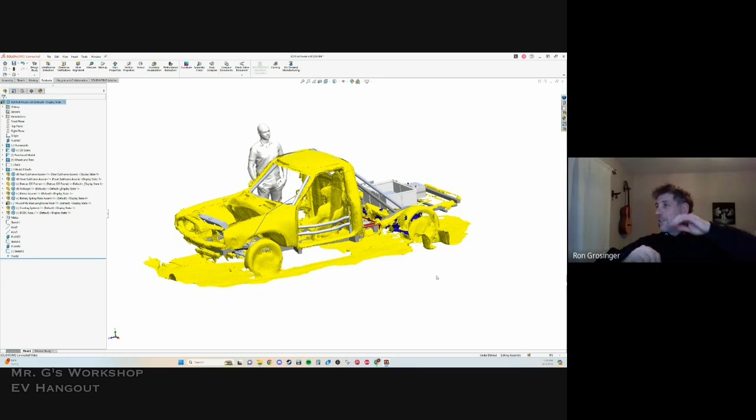Thomas, they're in this racing series called 24-hour Lemons, and it's a limited budget thing. It's all gas stuff, but they're trying to enter with an EV, and it's very difficult because speed-wise no problem, torque no problem, but how long can you last doing laps for 24 hours? So they're doing battery swaps. That's cool - my buddy did the Lemons tour, like the rally? You just go from place to place, it's a pretty long trip, several days. Yep, that's the one, Lemons Rally. That's cool, yeah, he told me about that.

That's really cool. How did you do the scan? So for this bigger scan, I have a buddy who uses a 3D scanner for crime scene investigation, of all things. This is actually pretty low res, I think it's like 5mm. But let's see if I can get this to open for you guys. You just need to see the body lay in there, right? Uh-oh, it's frozen. This is wild, what a cool thing. I use a scanner called Einstar.

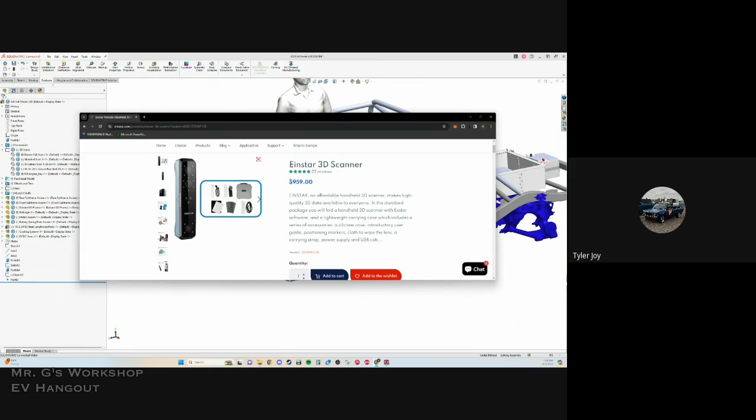I'll pull it up here. This guy, not too bad - still a little pricey, but for your average hobbyist this is achievable. Is this better than the iPhone? Oh, this is magnitudes better, I think it goes down sub-millimeter. It's a tight enough tolerance that I can get in here and actually design drivetrain layouts and scan the frame, so I know it's going to fit the first time, essentially.

Sweet, yeah, wow, that's actually pretty cool. Which part is scanned, is the blue scanned? The part that is crashing SolidWorks. Hold on - oh, that's okay, turn some other stuff off. There we go.

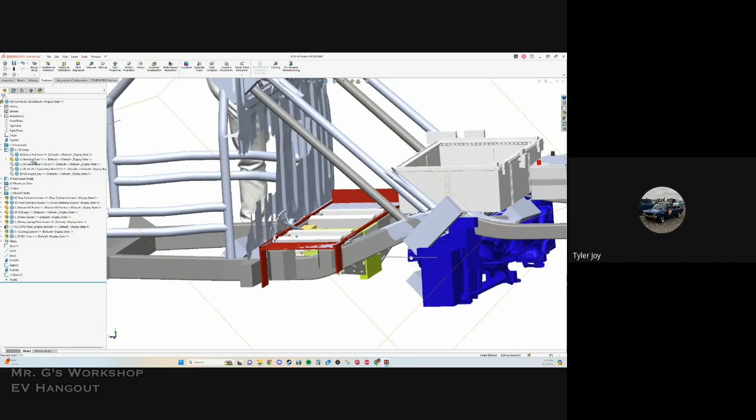So this guy is a scan. All right, I'm just going to put this on my bigger screen so I can see it. Wow, this is so cool. That's cool, you want to zoom out, show us a little bit? Yeah, okay. Need to hide the chassis here as well. Is it still crashing? It's not crashing, but it's definitely not happy.

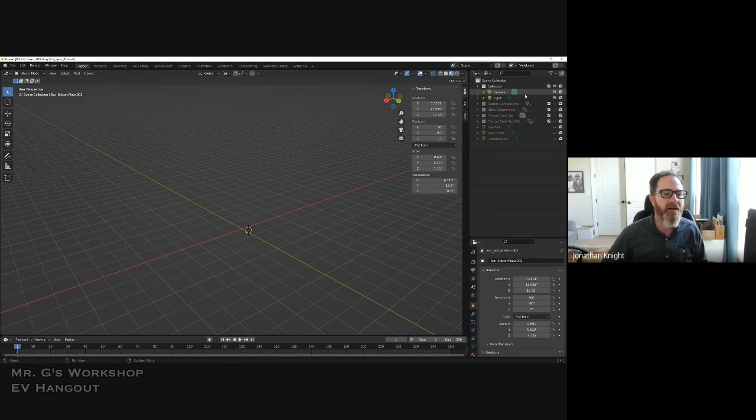Basically, I've been thinking about what my battery box should look like or how it should be built for a long time, but I hadn't really done it practically. I got my battery modules from EV West, and they had the 3D models for the modules available on the EV West website, so I downloaded that. These are LG Chem modules, and I knew I was going to fit 6 of these units in each of my battery boxes, and have two of the boxes.

So I just started by lining them up and thinking about what goes into the battery box, modeling all of the little components and laying them out.

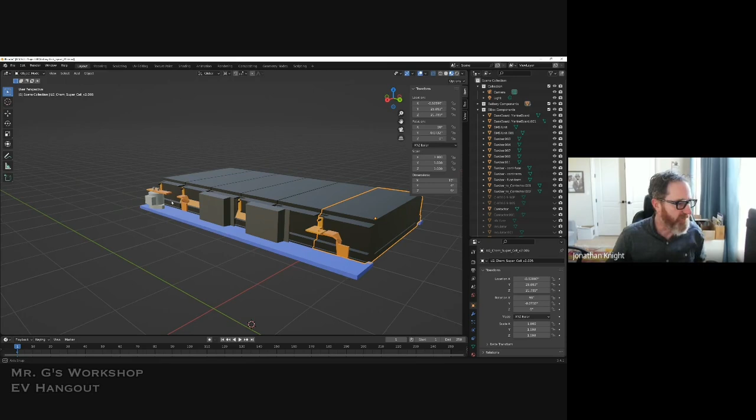I modeled up the bus bars - I got these ones already made, which are the copper bus bars, and I modeled those and put them in. Then I modeled some contactors, just taking measurements and building them out. Didn't take that long.

These ones will not only cut, but they'll also bend. Hopefully the more complicated ones I'm making now, which I haven't gotten cut by SendCutSend yet, will be able to do that too. If not, I'll have to bend them myself, but they're a little bit more complicated.

There was some kind of funky J bend on the one on the far left side. That's because it has to come out of a little pocket in the battery module, then bend around in order to reach the right height for the contactor. So I worked that out.

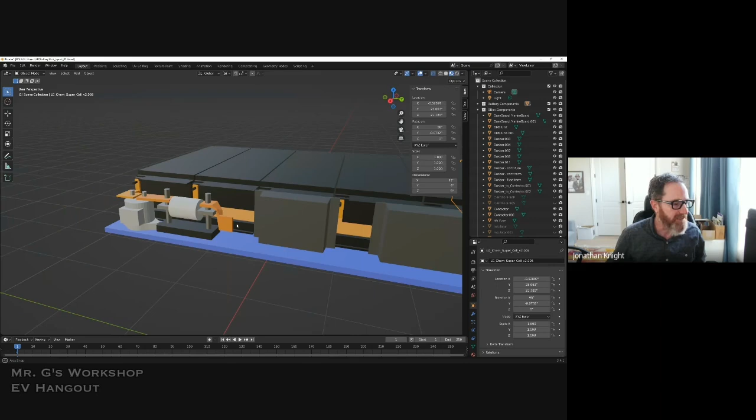I was thinking about practical things, like I've got all these exposed contacts on both sides of the battery, and I'm going to have metal walls on my box. So I thought about using some fiberglass insulation sheets to place in there to isolate things a little bit, and also do double duty to mount the BMS units.

You could 3D print something - it'll be absolutely insulated.

So basically, I was able to fit everything into this space. There's a couple of other little bits, like these bars that I want to use to lock down the battery modules so they don't move around.

That looks familiar, cool. Kevin was just asking if you had any cooling, Jonathan.

I'm not going to have any cooling in my battery boxes. For one thing, these modules are not that easy to cool - they don't have any surfaces that aren't covered in plastic. And another thing is I'm not going to be racing my car, so I'm probably not going to have that much heat gain.

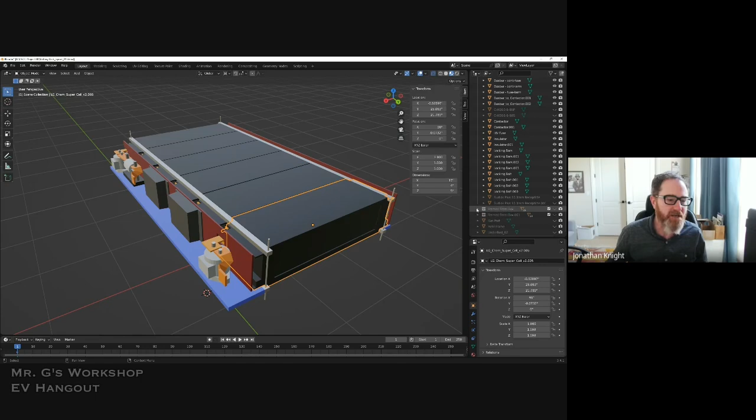So the next thing I started to work on is what my battery box is going to be made out of. I just modeled these 3/4 inch steel angle bars, and just sort of built a box.

Then I started thinking about what's going to go into the box - a sheet of aluminum across the bottom, which will sit on that shelf and then be bolted in.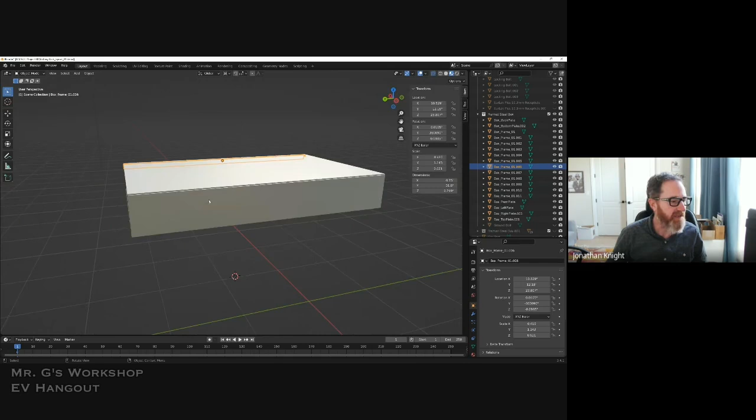That's really cool. Are you going to get SendCutSend to make these parts? That's what I'm thinking. And then the front, back, and top ones will sit on the outside and get bolted on from the outside, because I'll have to be able to remove those in order to get access to do any maintenance on the interior.

One of the cool things I was able to get downloaded was... it's turned off. So these are like some SurLok high voltage connectors, and then this is a Deutsch connector for the low voltage components. Oh wow, this is really good. Yeah, it's kind of cool because then you start to figure out where all these things can go, and they connect to the bus bars.

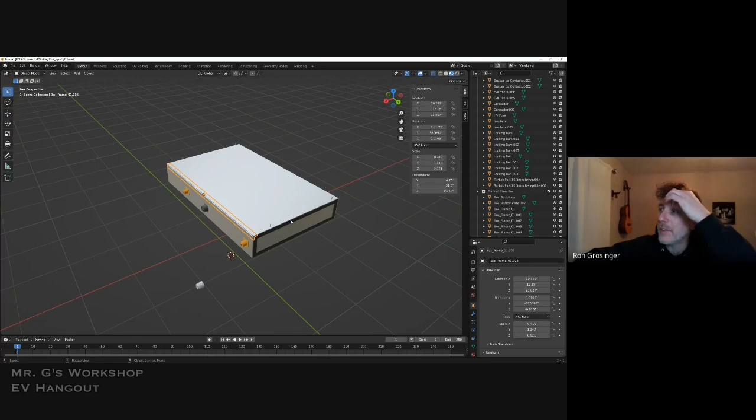Yeah man, this is great. Now, have you considered how heavy this is? Is this your entire pack? So this is the whole pack. I'm a little bit concerned about it, but I think with the aluminum plates it probably won't be too bad. The steel bars are not terribly heavy.

But the next thing I was looking at is placement. So I'm gonna have two of these. I have like another copy of it here. And like we were saying about doing the scanning, I use my phone. I don't have an expensive scanner, but I use my phone to scan the bottom of the car here.

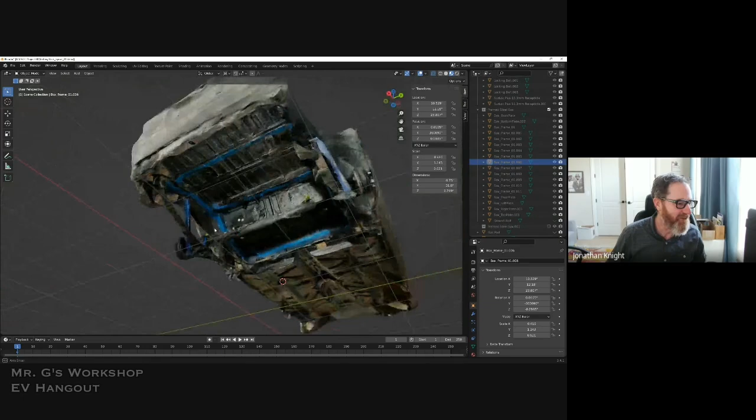What's this car again? It's a 75 Honda Civic. Oh my God, and you're putting all this battery in there. There's so much battery. So you can see this is sort of the underside of the rear of the car.

And I'm going to call Soichiro Honda, and I'm going to tell him what you've done. He's going to roll over in his grave, man. This is like a lot of power for this little car.

Absolutely. So this area here is where the gas tank came out of, so it's kind of a perfect spot. And then this is underneath the rear trunk, which had a spare tire, so I'm sacrificing the spare tire. I was really happy to see that when I get my boxes in there, they fit really nicely.

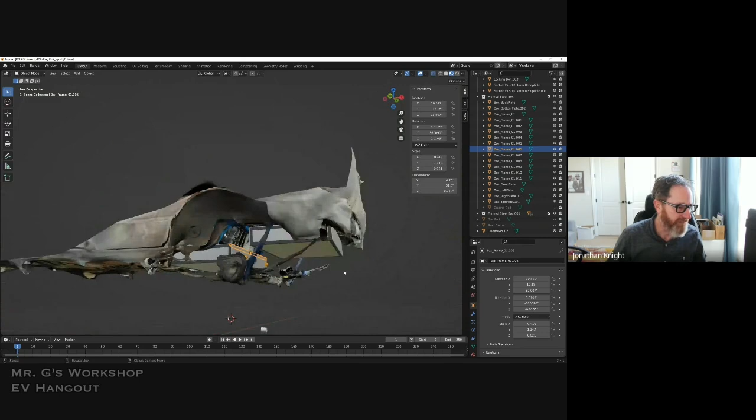Dude, that's great. What about suspension? Is it out of the way? Yeah, so this model is extremely rough from the scan, but you can see this is the rear axle there, and it's basically on leaf springs. It's front-wheel drive, so it's just like a trailing axle, it's not really doing anything, it's almost just a solid axle. It's got leaf springs. It's possible with the weight of the batteries when I get them in there that I might have to beef up those leaf springs. We'll see how much it sags. I've considered that, but that's not a huge deal.

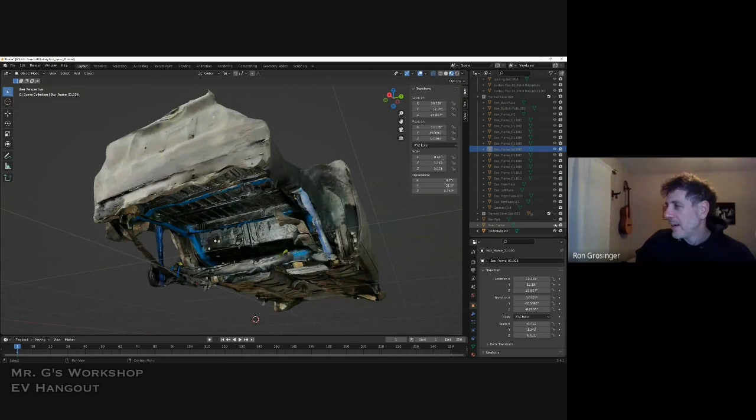This is so interesting, wow. So the next step I'm doing with this is figuring out how to mount them. I was just gonna say your brackets. You get, I'm sure it goes without saying, you got to spread the load. You can't just bolt it to like a piece of sheet metal. Exactly, you're gonna have to back it up.

What they did, if you might want to take a look, and Kevin can help you with this, I have some photos. You might want to look at the battery mounting option for the bus that we did last summer. What you'll find is that they put a kind of bar on the top of the sheet metal, and then countersunk really heavy duty stainless steel bolts that went down and grabbed the box, to go on the bottom of the sheet metal, just like you're doing. So the load is spread out on that big piece of sheet metal where you would have held the gas tank or a spare tire or whatever. No, that's a good idea.

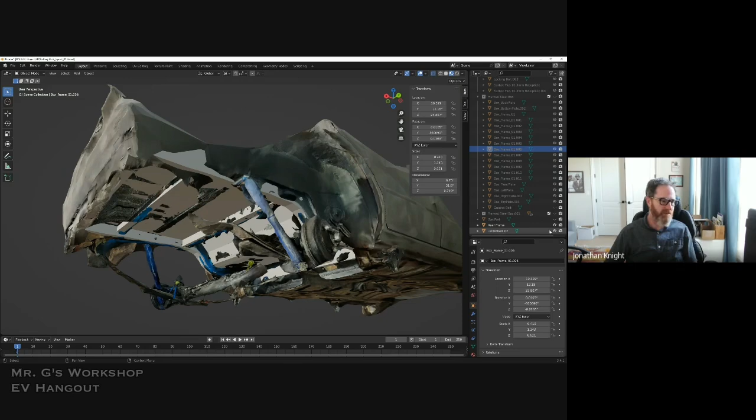What I've done is I've just done a very basic model, but basically tracing where the load-bearing rails of the frame are. So if I turn off... so you can see, when I was scanning this, I just went under there with a can of spray paint and sprayed blue paint along the rails, just so that I was sure I would be able to see them in the scan. And so then I basically traced those using just some basic cubes and shapes. And then I went back to the actual car and measured with the measuring tape and did it on paper, just to make sure that all my distances between all of these beams were correct.

Dude, that's a really good idea. That way I can start to model out some kind of brackets that will connect to those rails.

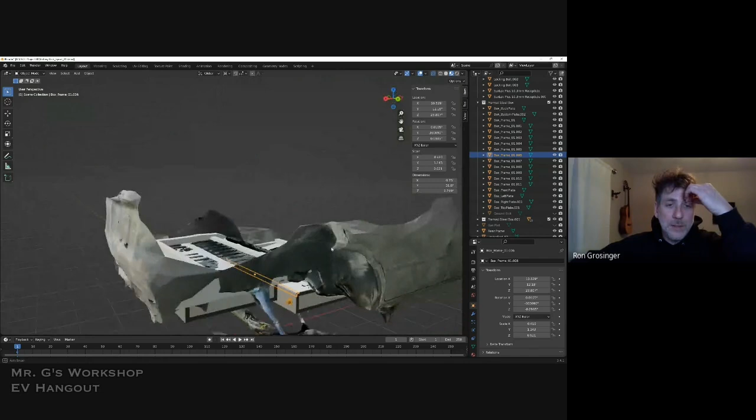Yeah, I have some photos. I don't want to interrupt you presenting, but if you stop presenting for a sec, sure. I'll show my photos that I have of the bus project that relate to what you're talking about. So here you go.

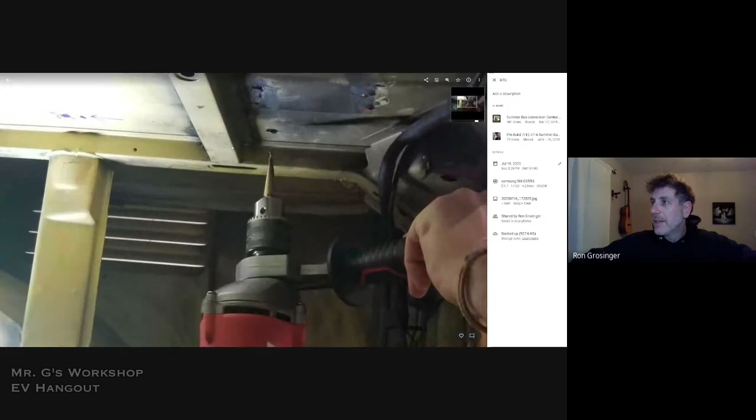We were like, oh my god! But just like you said, there are these folded pieces of sheet metal that are considered the load bearing here and here and here. You can even add some if you wanted to, and then we cut holes. You might want to use a stepper bit like we did right here, because it doesn't grab it and pull you, it goes thud, thud, thud, thud.

It's really nice, I don't know if you've used one of those. Yeah, okay, so that's awesome. And so then they had these, let's see, so what you're seeing here is we bolted it from the top, and it's spread out. It's got lots of strength, it's not going to pull through the sheet metal. Well, you'd hope not. And then the countersink helps. So anyway, I hope that helps.

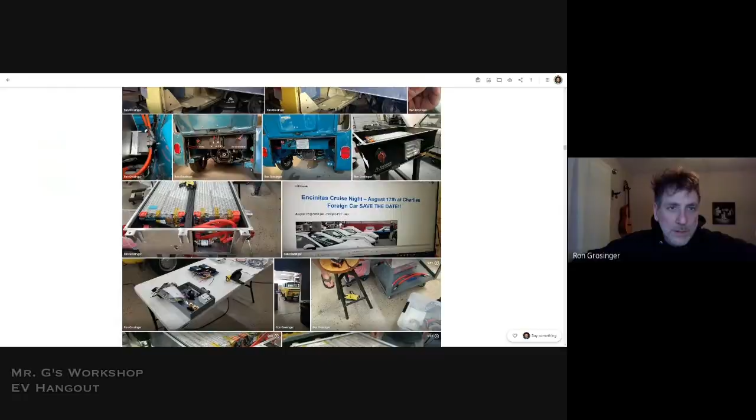Definitely, yeah, dude, this is so cool what you did. I really appreciate that. Can I show one other thing real quick? Yes, please, yeah, do it.

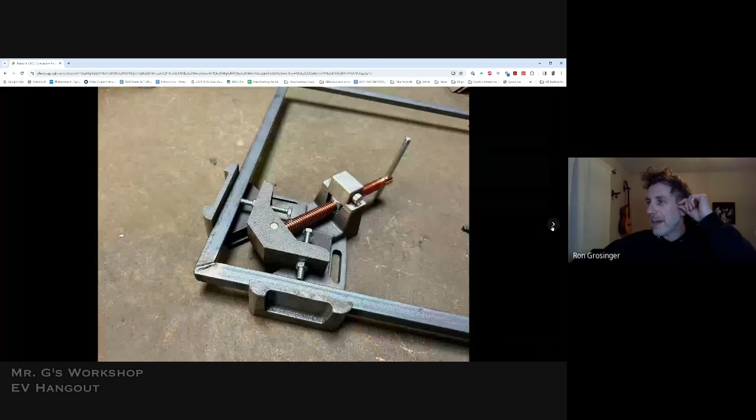Yeah, nice, good job. So, and then fitting those frames, the pieces of the frames, just to see where they fit in the actual, against those rails inside. There you go. So I'm confident now it's all going to fit, which is really cool.

Ah, this is great, man. And your car is going to be a sleeper? Like, is it going to look like an old car? I would assume so, I'm going to paint it the original color. I kind of regret stripping it because it kind of looked pretty cool when I got it, but I did, so I'm going to get it repainted. Oh dude, come on, sleeper car, and then just roll up at the stoplight, just liquefy your tires.

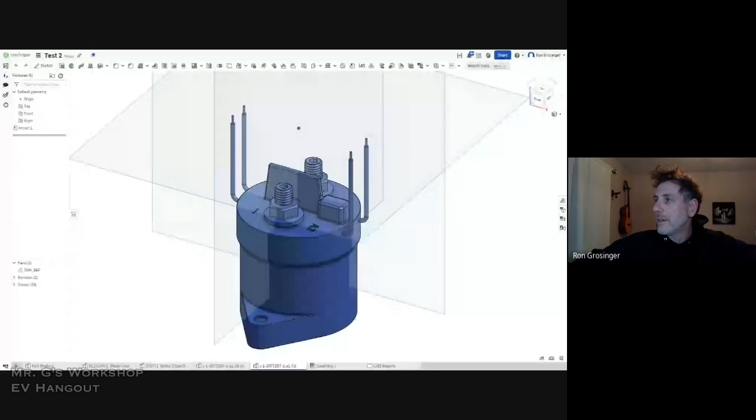I can just, somebody went ahead and gave us the model for this, I forget who dropped that in the chat, but here you go. You got a situation where you have your contactor, and I just pulled it up on Onshape really quickly. Oh yeah, yeah, I should also mention places like Mouser and DigiKey. If you find the manufacturer of that part, usually you can go to their website or just email them and they'll send you a CAD model. Nice.

Well, it looks a little better than mine, but you can have this one. What was this, was this a Tyco? Is that right? Yeah, it's a Tyco.

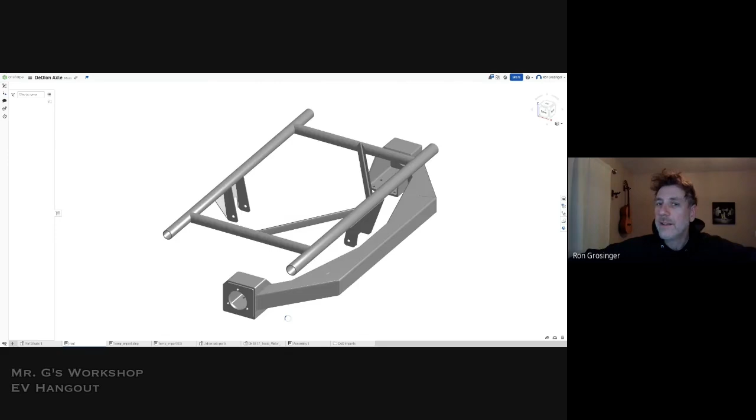So this is what's underneath his Luxie pickup truck, which has a DeDion axle, kind of like a live axle that goes around the motor, and the motor stays in place. He's done a ton of videos about his pickup truck and how it works and all the upgrades he's doing, like a hitch, and it's Tesla powered, but it's got an i3 battery pack. So there's just a lot of cool stuff that Johnny's doing, and you can catch up with him.

He's also rebuilding the Tesla motors because there's an inherent water problem with them. So pretty cool stuff. And this one here is the axle, and then your leaf mounts would go right here. All right, I think that covers it.

This was an action-packed episode. Pretty amazing. Yeah, last minute subject worked out really well.